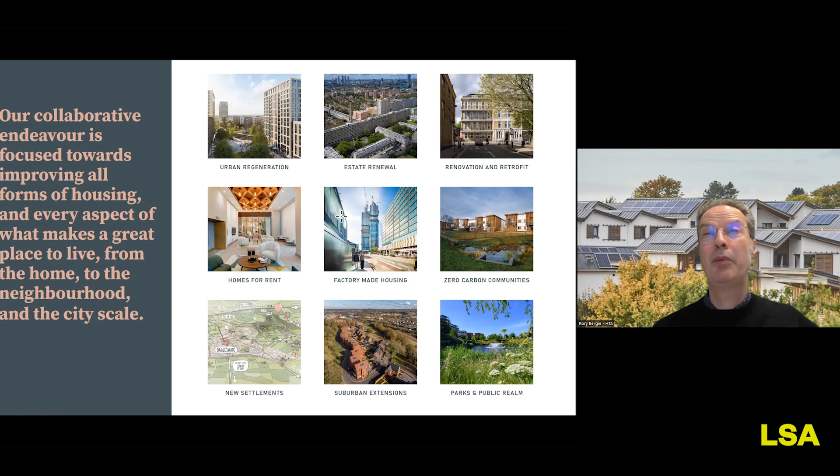As a practice, we cover all scales of development, from large urban regeneration projects to renovation projects, and suburban extensions and parks and public realms. So we have a large landscape practice, which is now, I think, 45 people. As a landscape practice, we're quite big.

We occasionally win awards, and so we decided a long time ago that being architects was great, but we needed help. So hence the sustainability and building physics, interiors, planning, landscape, and so on.

And we do like to build buildings. So we're not concept architects. We like to design buildings and build them. So we're quite technically minded, and we like to see things through from beginning to end, because we feel that if you design without a full understanding of the technical requirements of what it is you're doing, you're kind of in danger of going into territory where you can't go any further. You might come up with a problem of materials or performance. That means you've got to stop and go backwards, which is often very difficult.

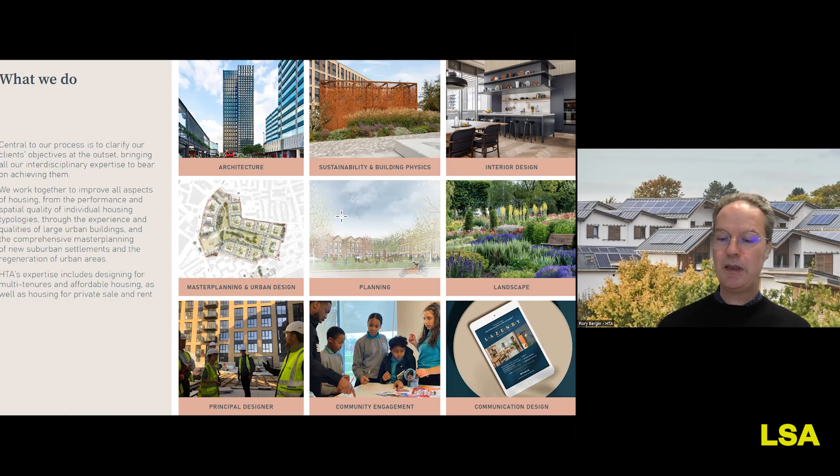We've a long history of being involved and interested in innovation in housing. So in the center there is the Greenwich Millennium Village, which we were the original master planners and designers for, with Ralph Erskine, the late Ralph Erskine, and other projects which are to do with prefabrication or interesting aspects of design and construction.

So we've participated in EU-funded projects, and we've participated in UK innovation-funded projects, and we continue to keep that side of the practice going, because we think it's often really useful to look at a particular topic in depth outside of the projects themselves, because projects themselves are usually quite time-focused, and clients are usually in a hurry to get things done. So having the opportunity to research is really helpful.

We set up this team, sustainability and building physics, about 16 years ago. And we have worked on some of the more innovative and difficult projects in housing in the UK in that period.

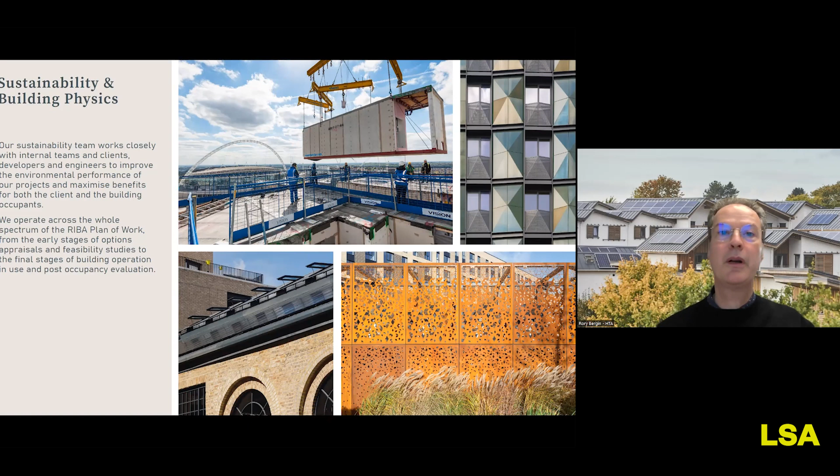And in order to do that, we look quite holistically at projects in areas including daylight, including how we prefabricate and manufacture them. We look at sustainability standards like BREEAM and Home Quality Mark. We look at what the microclimate might be, how comfortable, how safe, how warm it is outside in the public realm.

Our designs often include domestic and non-domestic elements, so we need to look at commercial spaces, thermal bridging, and U-value calculations. So looking at the nitty-gritty, how does a wall perform? How does a junction perform? All of these, as we drive down energy use and drive up energy performance, we need to look at things in more and more detail.

Including things like standards like Passive House and life cycle assessment. So life cycle assessment, looking at the environmental impact of materials, embodied carbon, embodied energy, and the pollution arising from the construction materials that we use.

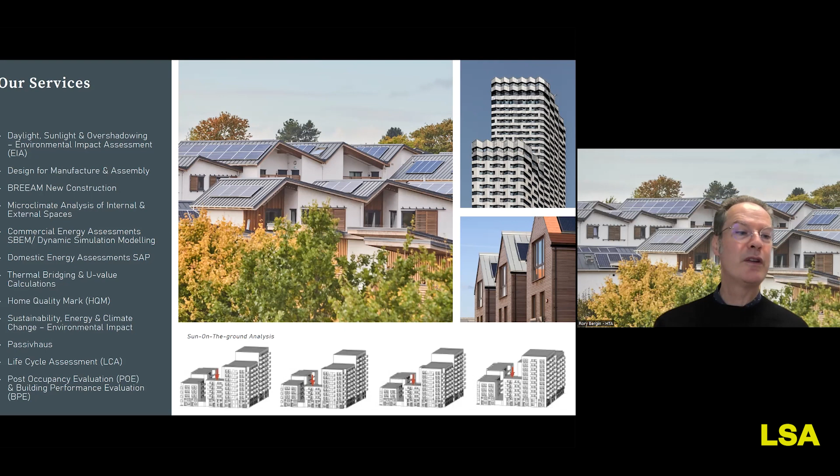And then finally, an area that we're not doing as much as we'd like to do, but we are involved in post-occupancy evaluation in different ways, because we feel that if you don't look at post-occupancy performance of projects, how do you know that you've achieved the goals you set out to, in energy terms or in comfort terms, or just whether or not you've satisfied what the client wanted? Are children performing well in the school? We don't do schools, but if we did, are people happy, or are people content with the environment they've got? Do they feel safe? Really important thing in housing. Do people feel safe walking to and from the tube?

Things like that. And while we use standardized tools, we also recognize that as specialists in the field, that we sometimes need to develop our own tools. So this is a tool that we've developed, which we use to look at the holistic sustainability of projects.

Instead of just looking at carbon emissions, for example, what we often find is that in the context of projects, there's often somebody, perhaps the client or a planning officer or a consultant, who's got a very strong view on a topic. And you can spend a lot of time, if you're not careful, thinking about one topic.

For projects to be successful, they need to think hard about lots of topics. This is a list of 40 or 42 issues which tend to occur particularly on our bigger projects. So areas to do with well-being, amenities, the environment, landscape, microclimate, and social value. Social value being a topic that has become much more discussed and looked at. What is the legacy of the project? How is the project helping people? How is it helping to involve different communities? How is it satisfying the needs of a variety of people?

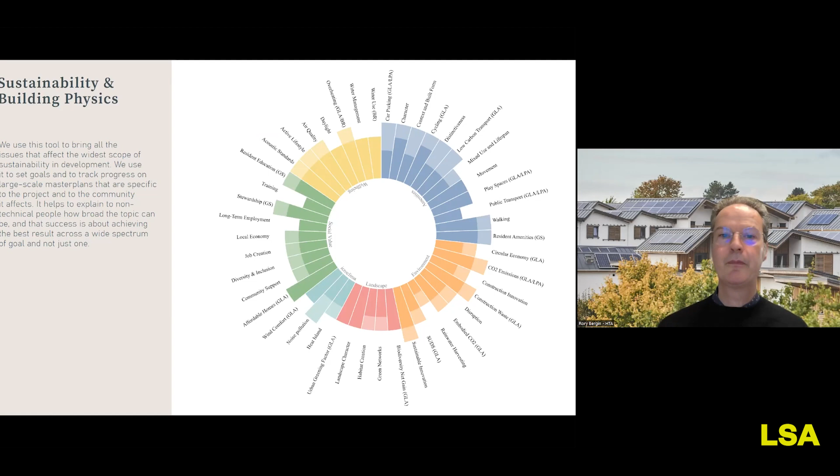As I mentioned, we do have a bit of a specialism in terms of prefabrication, and we've built with clients and with factories over 7,000 units of housing. Some of those are hotel rooms, some are student bedrooms, many are apartments, working with a number of different manufacturers. We've delivered some very large projects using this methodology, which we think has a very bright future, but which is suffering at the moment, along with every other building contractor, with interest rates and a slightly struggling economy.

This is an illustration of a number of our buildings built using that technology from 2014, 15 up to this year. So the one on the right, Enclave, or College Road at Croydon. In fact, those two buildings on the right, 10 Degrees and Enclave, are actually beside each other in real life. If you go to East Croydon railway station, they're a couple of hundred meters away, and I encourage you to go and have a look. They're a couple of our most recently finished projects.

Both of them are rental buildings. 10 Degrees is general apartments to rent, and College Road is a fairly unique building insofar as it's a co-living scheme—an early life stage accommodation, as we think about it. So people who are, say, moving to London for a short period of time rent a small apartment in Enclave, and then there's a lot of shared amenities.

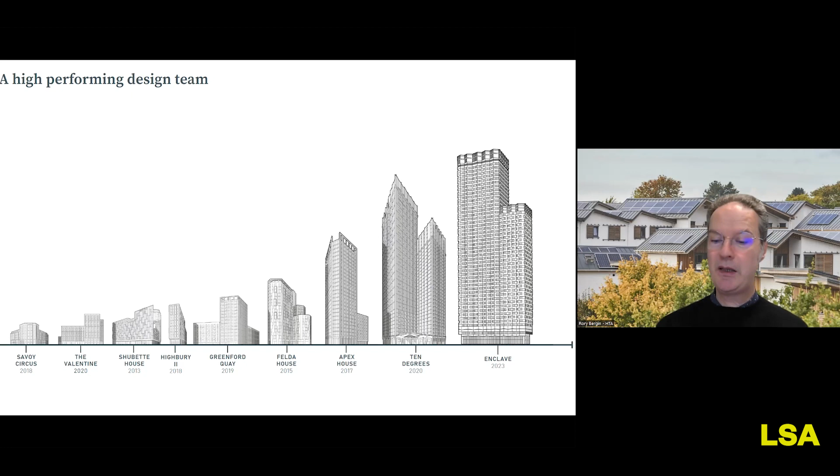So quite a wide variety of building types, all built in factories and brought to site on the back of trucks and then craned into place. You'll see some images of those later on. These are all the same buildings with a few more added in terms of appearance, just to show you that prefabrication doesn't mean everything has to look the same or be dull.

So we spend a lot of time, particularly on the cladding, designing the external walls to be interesting and to cope with a lot of the environmental issues that we have to deal with, in terms of daylight, sunlight, overheating, materials, technical performance, fire performance, and so on. One of the specific areas we spend quite a lot of time working on these days is embodied carbon.

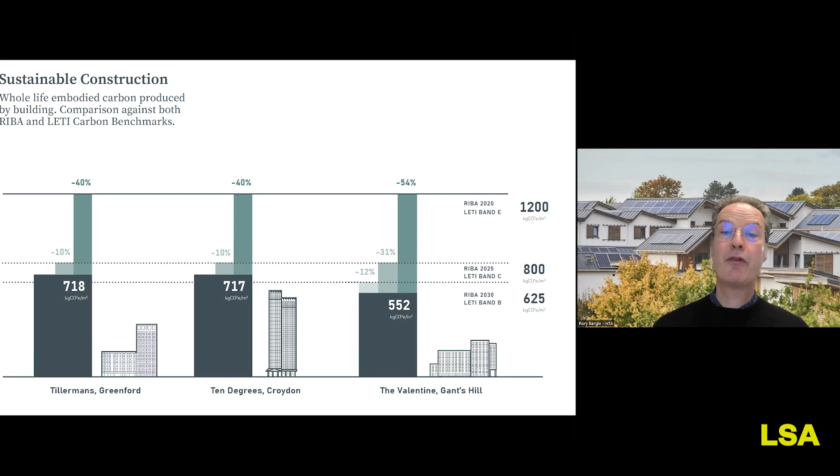This is a diagram of 3 studies we've done on 3 of those buildings, looking at the embodied carbon of the construction and how that compares with a similar traditional building. At the top line you've got the business as usual scenario, and the dark bars are the measurements from the buildings. Two of them, the 10 Degrees and the Valentine, are from post-construction analysis, and the one on the left is from pre-construction analysis. It's interesting to us that they're ending up very much in line with each other.

But it shows, importantly, that we're achieving pretty high reductions from using prefabrication over typical traditional buildings. Now, I would say that while this shows the benefit of prefabrication, it is early days in the understanding of embodied carbon.

I would say that the existing benchmarks will change over time because we need to push the benchmark down, but also what's happened in the industry since the awful incident at Grenfell Tower is that the industry has become very, very risk averse indeed in terms of building performance, and particularly fire performance.

So we are moving away from using timber in construction, as there's a lot of nervousness about using combustible materials. A lot of it, I think, is misplaced nervousness, but nonetheless the nervousness exists. Therefore, actually, the embodied carbon of lots of projects is going up instead of coming down, because we're unable to take advantage of the benefits of using timber in construction.

This is an area, I think, particularly for the students among you, that is going to require a lot of thought and attention from you in your careers, because I think we've made a lot of strides in the last decade on bringing down the daily carbon usage, the operational energy usage in buildings, but we've a long way to go in terms of the embodied carbon usage of buildings by comparison, particularly in the emissions relating to steel and concrete, the two primary materials.

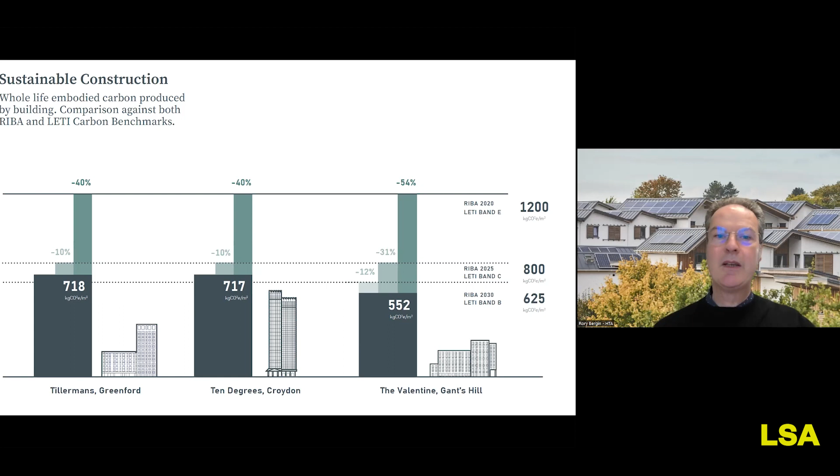And of the two, sort of slightly weirdly, I think that we can make steel using renewable energy or lower carbon energy, but concrete, the production of carbon dioxide from concrete is part of the process of concrete and much harder to deal with. So that's an issue for us to deal with as the profession moves forward.

So I suppose that's just an illustration that, for us as a practice, it's where we are, that we think we've made and are continuing to make quite good strides with operational energy, but we need to make greater strides with embodied energy.

But as designers, we have more control over the operational, because we can specify U values, we can specify performance values. Whereas with the embodied energy, I think it's harder for architects to manage, because when it comes to construction, we have less control over contractors than we do over performance. But that's not to say that things are stuck and that we don't have any agency, but it's definitely in a more difficult box. So how do we deal with that moving forward as a profession?

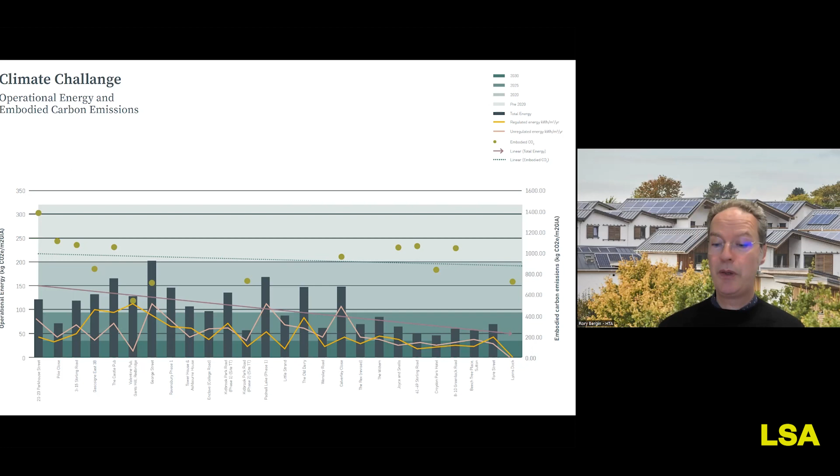So to talk about some of these things in more detail about specific buildings, the 10 Degrees project, which is one of those two prefabricated buildings, has recently been completed near East Croydon.

That living room will be painted, and the kitchen will have all the kitchen cabinets in, with the worktop, the cooker and the cooker hood. The ceiling will be painted and the lighting will be in. So basically, inside, if you walked into the room as it's hanging there—which I don't recommend—it would be pretty much finished, probably apart from the floor surface. Everything else will be finished.

That means 90% of the work for that piece of construction was done in a factory on the ground, in safe conditions, dry conditions, warm conditions, out of the wind and rain, and done very effectively. In our experience, construction workers in factories are twice as efficient as construction workers on sites, particularly on tall buildings.

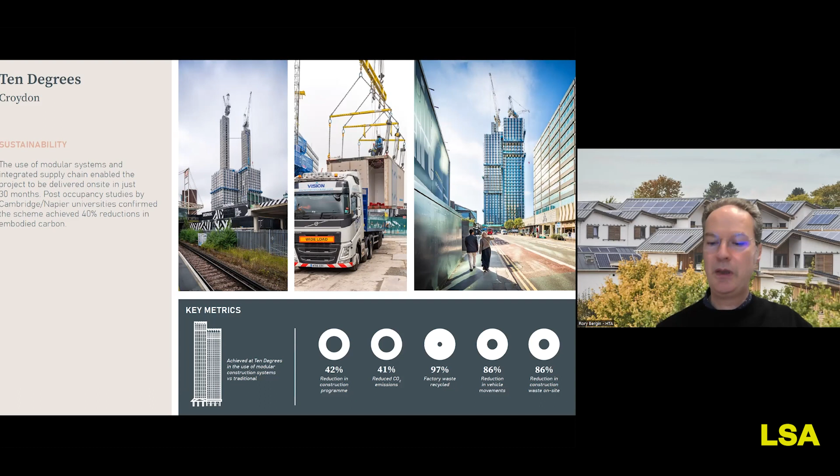You can see here a truck in the middle with the units being craned off, and at the bottom some of the metrics. It's a quicker construction program, so for a project that's in a rush, or where there's a big financial benefit to finishing earlier, this is the way to go. Lower emissions, much less factory waste, fewer movements of equipment, and very little waste on site. These buildings go up really quickly and have very little impact on their surroundings.

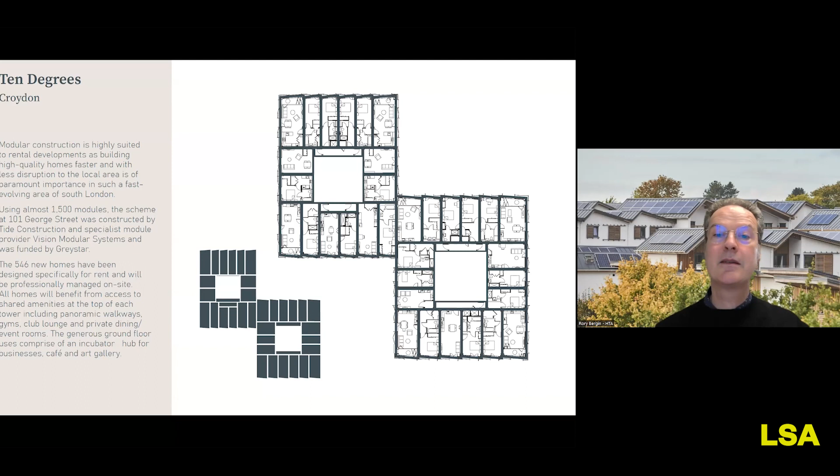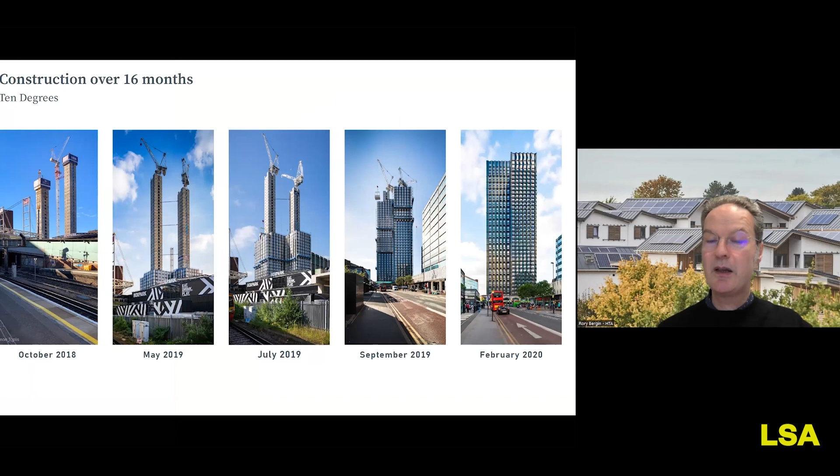You can see a sequence here where the cores are built first, then the modules are stacked up around them, and then the cladding is installed using mast climbers—those platforms that move up and down on the outside of the building. So a very mechanized, very efficient set of processes from beginning to end.

Some more construction photos, and then the completed building. The facade is a very complex part to deal with—having an interesting building while getting it to meet all the various environmental requirements, particularly things like overheating. So we've got shading over parts of the windows in the form of a sort of Juliet balcony, but also interesting shapes in the facade, so that the building appearance changes as the light changes during the day. The building color and appearance changes a lot because of its design.

We also have internal and external amenities in the building. Next door to it is this co-living project called Enclave. Nathaniel Furman, the artist, designed these terracotta or porcelain tiles, which are made in Stoke-on-Trent in a specialist factory, pretty much handmade.

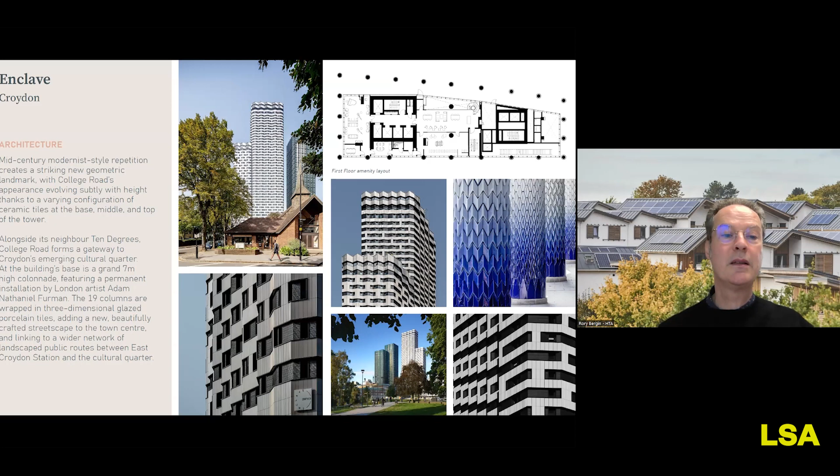You can just about see in that image that the colors change from top to bottom, going from white to deep blue—a really interesting use of craftsmanship and materials. The building as a whole is built in a similar way to 10 Degrees, but with a more complicated facade and quite a different appearance. It's straddling the railway line beside East Croydon Station, getting a lot of benefit of daylight and sunlight from its surroundings into those interiors.

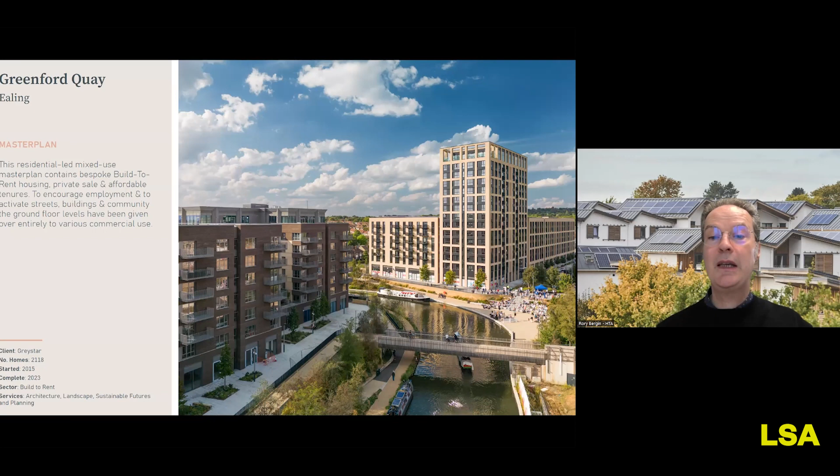And then another project in Ealing that we've done—again, this is all using manufacturing, and this is for an American client.

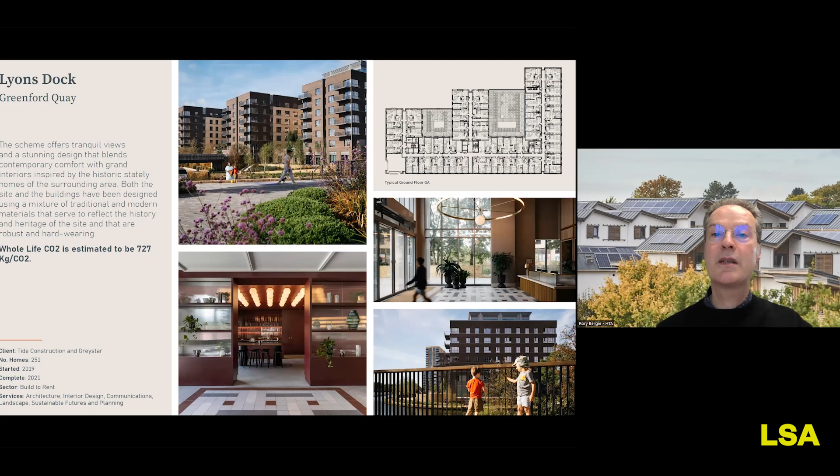These are buildings for rent, slightly lower scale, and more typical, more traditional apartments.

And then a project that we're working on at the moment in Enfield, we're working to deliver a large regeneration project. This is an interesting part of the practice's work, where we work with clients who have inherited existing estates, which are often failing because they were built badly in the first place, in the 1950s and 60s. So we have the discussion about whether or not you should retain those buildings and renovate them, either because they're attractive buildings or well designed, or because of the embodied carbon that's built into them. There's a discussion to be had about that. Generally, when we look at it, there are substantial benefits to not keeping them, particularly if they're badly built, because the costs of improving them are so high.

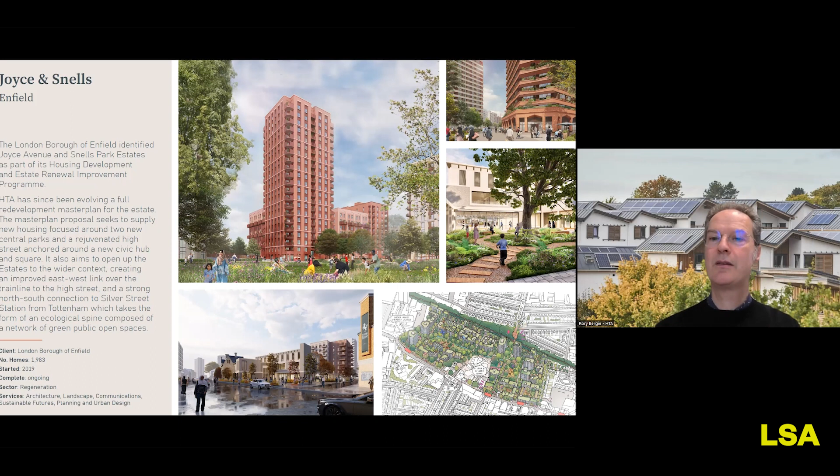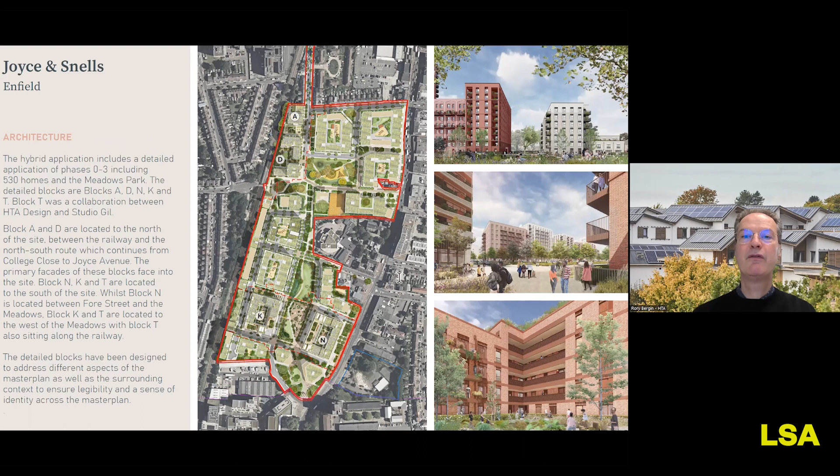The embodied carbon calculation demonstrates that if you demolish them and replace them with highly performing buildings, and you triple the number of people who are living there and who get the benefit of living there, then other benefits outweigh the carbon costs. But it's a complicated calculation, one that I think is changing as practice changes and as information changes. So we've done a lot of work on looking at how a project like this can work and how it can be built in phases. We also use that tool I showed you at the beginning to compare different options.

One of the things about building new buildings is that you can meet all current standards. So at the bottom left is where, in terms of performance, the existing buildings without change scores. In some areas it might have a lot of green space, for example, and perhaps the biodiversity is working well as it is. But there are huge areas of that wheel that can't be changed. When you refurbish it, there are some areas, particularly in terms of carbon emissions, heating and so on, that you can improve, but there's still vast areas that you can't change. Whereas with new build, you can have a much bigger impact. You're having some negative impacts as well, but you can also have many more beneficial impacts.

This is a discussion that is very live at the moment, because the question of what you should keep, what you should retrofit, why you should do one versus the other, is a live question, and an interesting one that bears constant discussion.

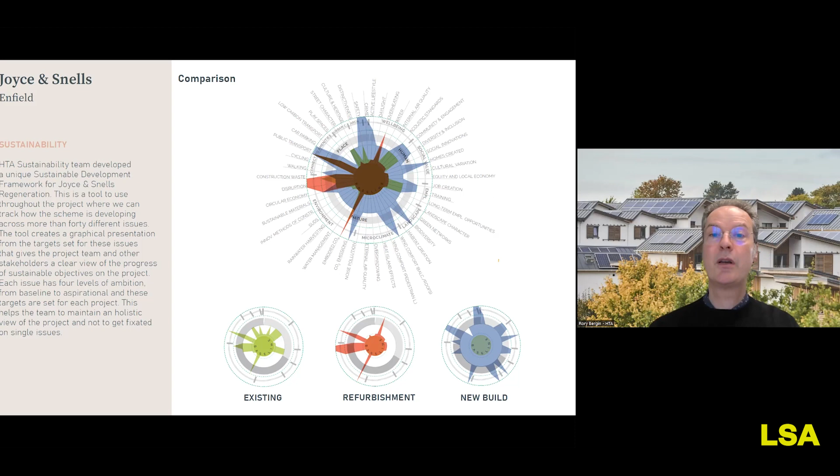Some of the analyses that we do as a team on projects like this: these images show sunlight falling on the ground. So what this is doing is looking at amenity spaces on the roofs of buildings as well as in the park we're creating. We're looking at how many hours of sunlight those get on the 21st of March, which is the solstice or equinox date we use to check such things. So a lot of testing of the design as the designs progress.

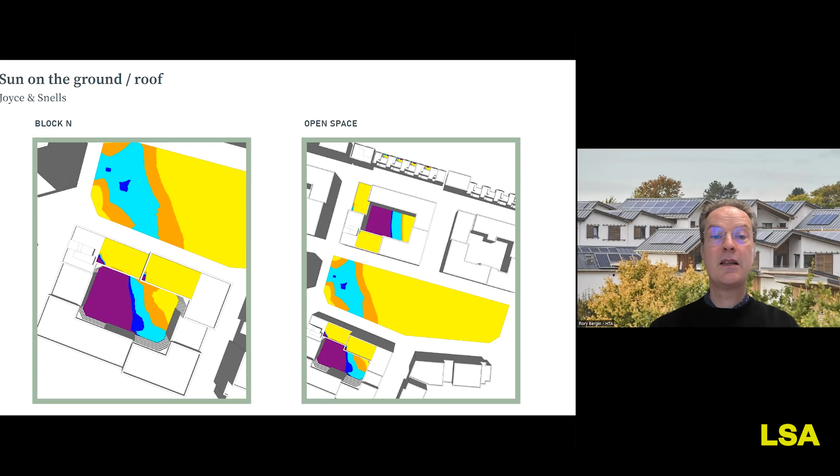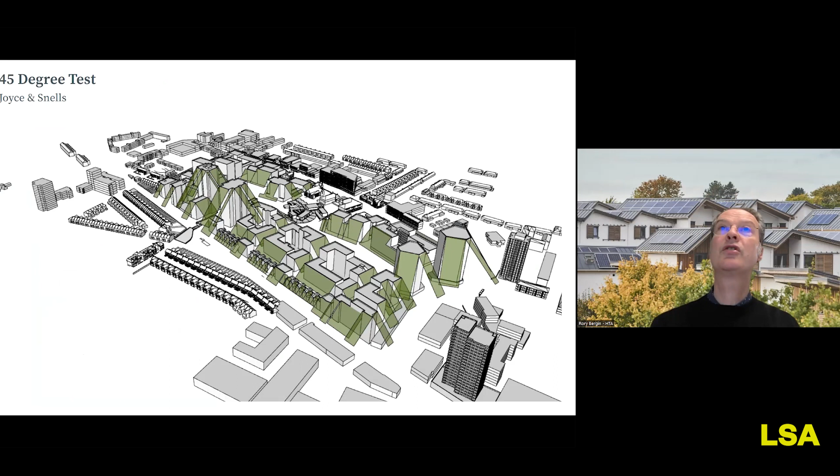An illustration of an early stage test to check what the impact is on surroundings. You plot a line at 45 degrees from the buildings to the surroundings, and if it intersects with an existing building, you can tell it's going to have an impact. You can see here, because we're building beside a railway line, that we're actually having very little impact on the surroundings. This is the kind of early stage check that we do on projects to test whether or not we're having a beneficial or a negative impact.

We also do a lot of analysis on the performance of internal daylight. You can see here some sample apartments from a building where we're doing internal daylight tests, and all the greens mean we're doing very well. Then a couple of rooms at the top where we're doing less well, because one of them is a big room—so we've got a big, more generous space, but also a balcony in front of it. On the one hand, we're creating an amenity for the inhabitants by giving them a balcony, but balconies inevitably overshade or cast shade, so that reduces the amount of daylight. On the other hand, and this is back to that wheel with all of the issues, by shading it we're reducing the risk of overheating.

I'm pointing out here the dangers of focusing on just one issue. In my recent experience, planners and other authorities focus a lot on daylight, but don't focus nearly enough on overheating. And in the end, overheating is a bigger risk for residents, because if you overheat a lot and can't get a good night's sleep, your mental health deteriorates rapidly, and your physical health is likely to deteriorate too.

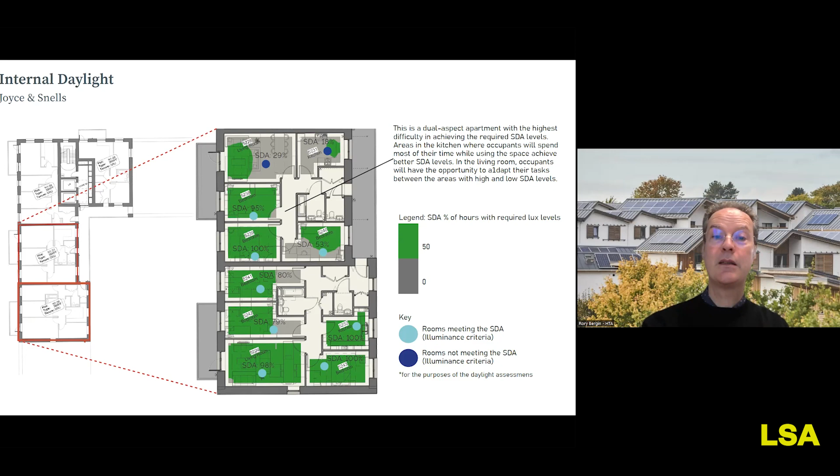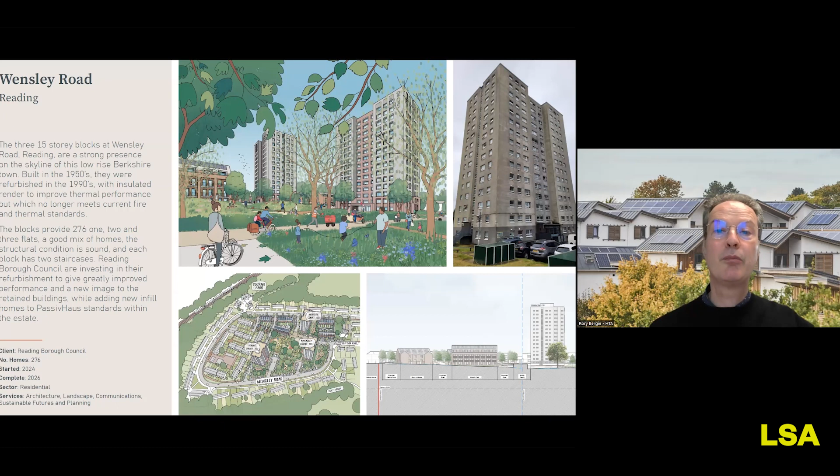So in designing places for people to live, overheating is more of a risk factor, which is a change, I think, particularly in the UK, because we're not really used to considering overheating as a risk factor here. But because of rising temperatures, it is, and it's going to get worse. Finally, a smaller project in Reading, outside of London, where we're looking at building new homes around existing tower blocks and refurbishing them - a couple of 1950s tower blocks that are being retained and improved with residents staying in them. We're improving the performance of those buildings as much as we can by overcladding them and putting in good ventilation and making sure they're not going to overheat.

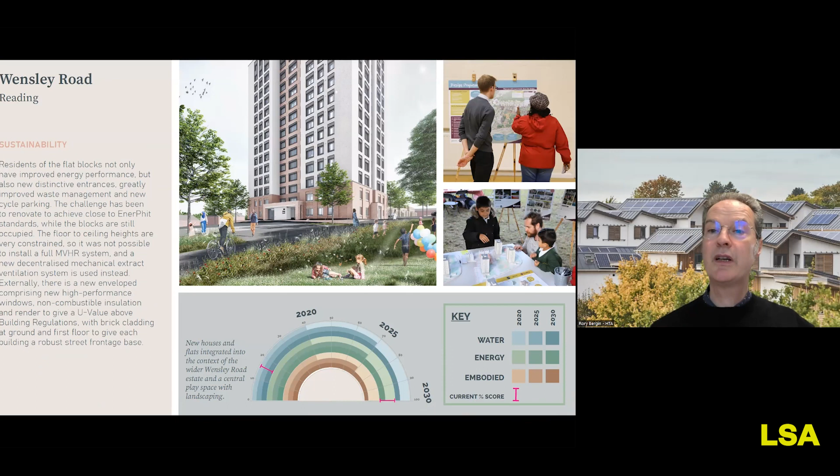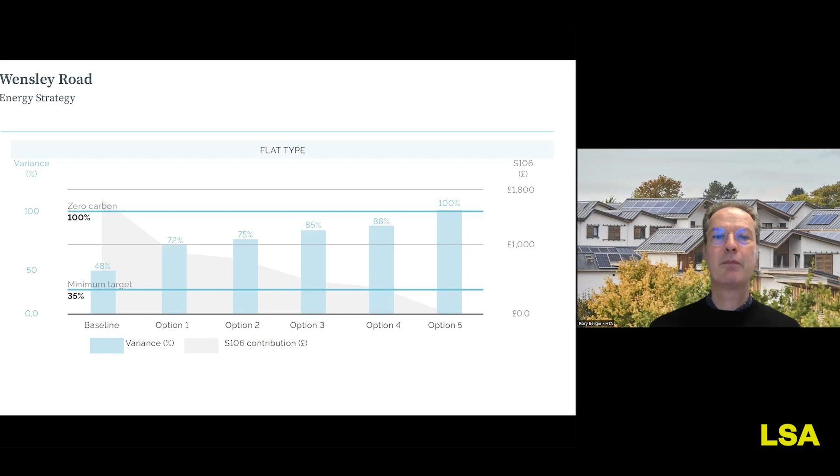And then finally, on the same project, because we had existing towers to check and improve, we also did some analysis on wind conditions - looking at the impact of wind coming down the face of towers. Is it safe to be near the towers? Are there things we can do? Do we need to plant trees to mitigate the effect of wind?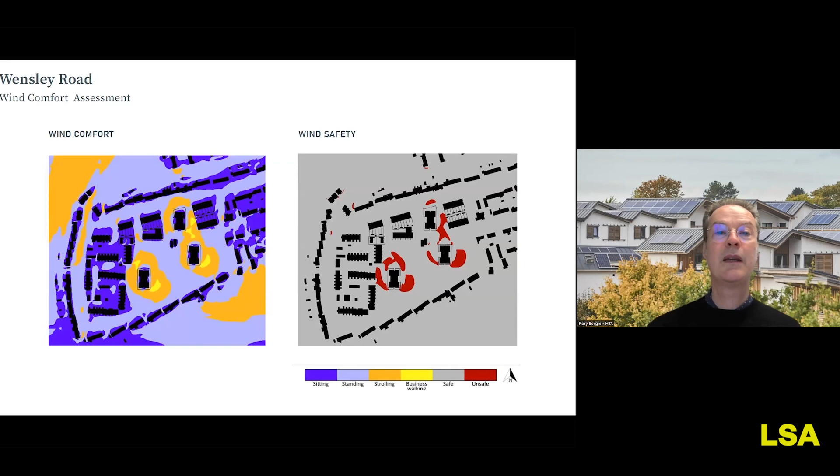So that's a quick canter through a lot of the analysis and thinking that we do as a practice, and that we try to apply to as many of our projects as possible. I'd say it's a constant learning experience. A lot of this has changed dramatically in the last 15 years since I've been involved, and will probably continue to change over the next 15 years as you enter practice and become architects.